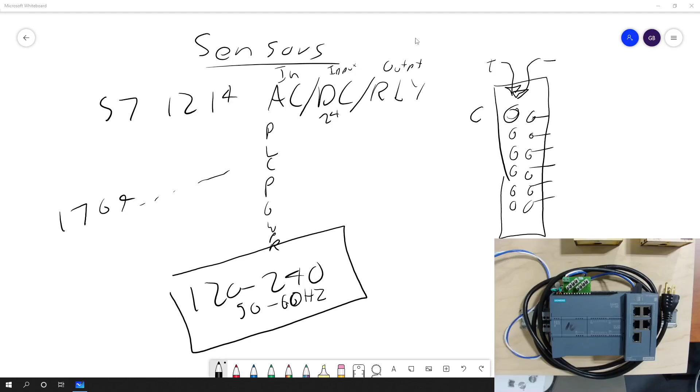I digress. So, PLCs are, overall, in my opinion, wonderful devices. Let me just move this up. Can't go any higher. That's interesting.

As I talked to you guys last class, in previous days, if you wanted to hook up, say, 3 limit switches to a relay or whatever, you would wire a limit switch to a limit switch to a limit switch, to your relay or whatever output it was. And you would physically take a jumper wire to all those things. Fine and good, no real issues there.

And when you're first wiring your machine up, it's not a big deal because you're running all the wires anyway, so where you run the wires to doesn't make any difference. The problem is down the line when you want to say, you know, we really don't need this limit switch anymore. Now you have to go take that limit switch, unscrew it, connect the two wires together there, which makes a joint there that you might not want.

And it's okay, and then you're like, oh crap, we need to add another one over here. So now you got to break a wire to come up and put another limit switch in, and then come back down. Life just gets very, very annoying as you're constantly tweaking this wiring diagram.

More importantly, hopefully you're not just tweaking it on the machine. Hopefully you're tweaking the actual diagram that shows you how everything's wired, and hopefully you're updating the numbers. So hopefully this is wire 1, this is wire 2, this is still wire 2, and then 3 and 3, and 4 now comes up to here, 4, 5 to 5. Hopefully you're updating the numbering as well.

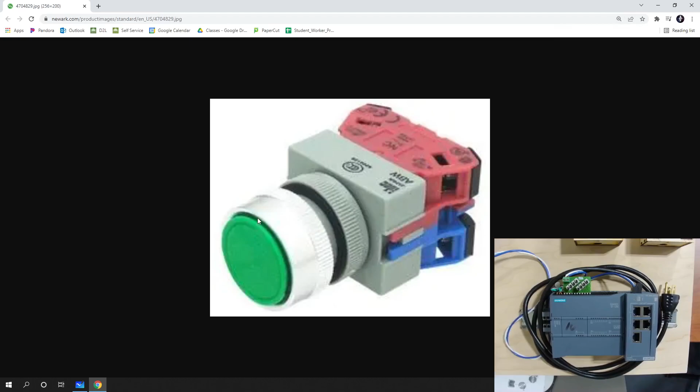There we go. So here's your standard push button start. As you can see here, this button now, you've got a little bit of a dividing line. You've got a red side and a blue side. The red side, I'm going to guess, is your normally closed, and the blue side would be your normally open contacts. So depending on how you need the push button to be wired, you would wire it differently.

And if you had 10 things that all needed normally open contacts, but they couldn't be in the same circuit, you would take these blue and red sections and you would just stack them. So you would have another thing here like that, and then another one there like that, another one there like that, and you would just keep going with it.

And every time you would add another one of those, it would actually make the button harder to press because all of those have springs in them. So technically, there's no limit to how many of these things you could stack other than the depth of your box. In reality, there's a limit to how many of these buttons you want to press.

No, but you could do it. You could literally have 20 sets of contacts on these things, and they'd all get pressed every time you press that button. But again, this makes wiring a royal pain in the rear end.

All right, so what we've started doing is we come down and we now have our PLC. Talked about this, guys, a little bit last class. So you have your inputs, it's going to draw 4 of them, 4 outputs.

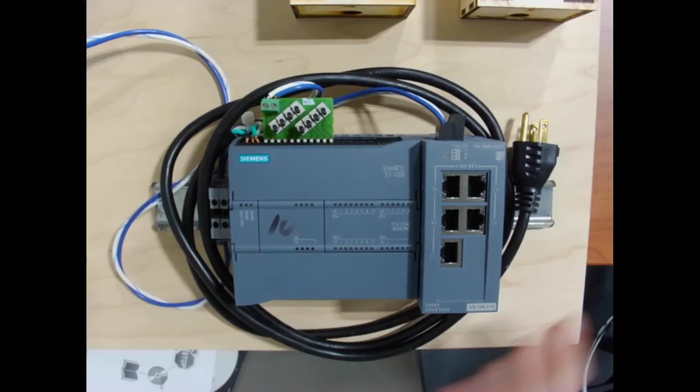So we have our inputs on the left, and we always start at 0, and you have your outputs on the right. This isn't necessarily right and left. If we take a look at this one, at the top, that's where our inputs are, and at the bottom, that's where our outputs are.

Again, if this was, if we had more modules on the side here, where the Ethernet switch is, that would be your inputs. The next one would be your outputs. And the next one could be inputs again. The next one could be outputs, or it could be analog, or high-speed counters, or whatever combination of I/O that you need. You would just keep slapping more and more modules on. I think this PLC can handle up to 8 modules for inputs and outputs.

Or you could have communication modules there. So it's just a never-ending game.

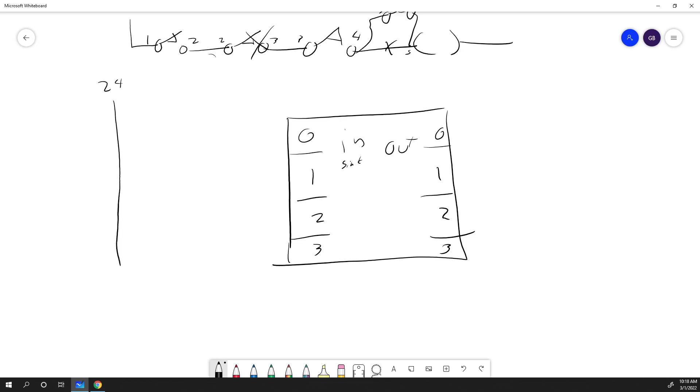But anyway, nowadays what you would do is take this and say this is a sinking input, so we're looking for 24 volts coming in. We'd have our 24 volt line here, and you'd run off of this, and traditionally it'd be one input per input. So we have one limit switch there, another one here, a third one there, and maybe a little push button down here. You just have one input, one actual sensor, button, limit switch, photo, whatever, per input on the PLC.

Could we, in theory, put a second limit switch here? Any takers? Yes, in theory you could. That would be permanently wired in series. So you have to think about that in your code, that both limit switches would have to be true for whatever it is to be true in this code.

But yeah, you could wire multiple in series. The downside of doing that is it makes troubleshooting harder, because if you don't know there's two inputs, two limit switches on this, and you're out there pushing a limit switch going, which one is this? And you're like, it's not lighting anything up, the wiring must be screwed up. Now you're having a problem troubleshooting because you're thinking one sensor goes to one input, which is overall the standard. But yeah, you could do two in series, you could do two in parallel if you wanted to, you could do something like that. That would be fine, that's an or statement, so one or the other. But again, ideally, one input per input on your PLC.

Now you have your output over here. In our case, we only have the one output.

But anyway, so here we can see some - that's my download manager. Here we can see some PLC code, and you can see I've got a make contact, which is again normally open, and I've got a break contact here, which is normally closed. And the real world switch here is normally closed, which lets power flow, and then as soon as this device rotates around and hits that limit switch, that keeps it from rotating more and basically running a stop into a wall. So that's why we threw this up there.

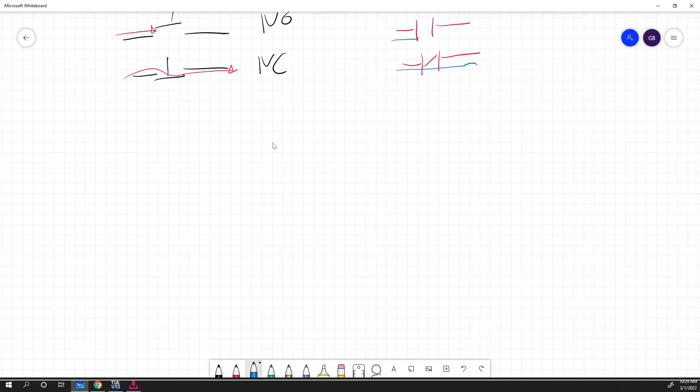Now, the other wonderful thing you have in the world of PLCs is addressing, right? And it's how do we reference the inputs? If I pull back up my PLC over here - let me get the wrong button - I'll pull up my doc cam. All right, let's give it a little focus, and let's just zoom in some.

There you go. So you can see I have DIA 0 through 7, and I have DIB 0 through 5. And I appreciate them labeling them A and B. However, in the software, nowhere is there A and B. It's like, why did we go with A and B? In default, in the world of Siemens, it starts - A is 0.

So you have digital input 0.0 through 0.7, and then we have digital input 1.0 through 1.5. You don't see it - thank you. Go to the right screen. There we go. All right, so you've got digital input 0 through 7, and input 1.0 through 1.5. Now, again, A would be 0, B would be 1.

However, in software, you can change it. You can be like, nah, input A is now input 5. And it does go 5 and 6, and it's always one right after the other in this case. I don't know why you'd ever want to change it. Siemens gives you the option. I think it's silly, but I'm like, okay, I understand.

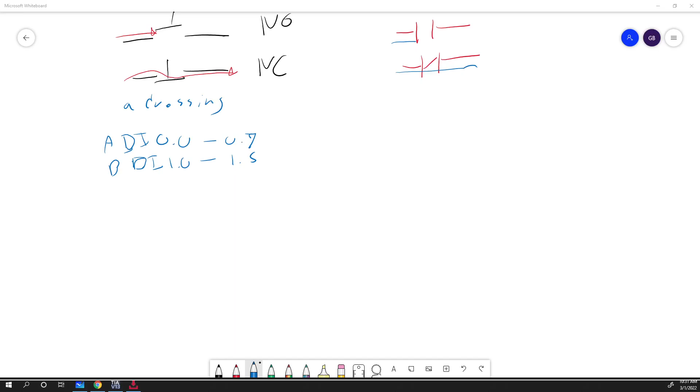It's there. You go to Allen Bradley and the RS Logix 5000 - do I have that installed on here? No, I do not have it installed. It's like local, because you can have local or remote, depending on where your inputs are. The local would be attached to the PLC, remote would be all on the network. And then it's like local dot, 0 dot input dot - this is wrong, but anyway - dot data dot number.

I'm like, holy crap, that is a lot to remember. I mean, that's RS Logix 5000. Go to 500 is a whole different game. It's just this never-ending game of things being different, which is the part that drives me absolutely batty in the long run.

So the labeling of these is really annoying. And again, you'll get used to this. You're going to be in whatever environment it is that you're in. That's mainly an Allen Bradley, mainly a Siemens. Those are the two biggest names in PLCs.

Siemens and Allen Bradley. I was just talking to an ABB rep, who does the robots that we have in here, and he said that Allen Bradley might actually be starting to lose some market share. Allen Bradley is mainly, I think, a US-based company, where Siemens is Europe.

So Europe uses a lot of Siemens, where Allen Bradley is more US-based. It doesn't mean there's not Siemens PLCs here in the US. Obviously, I have a whole 12 of them in the closet back there, so we use them here.

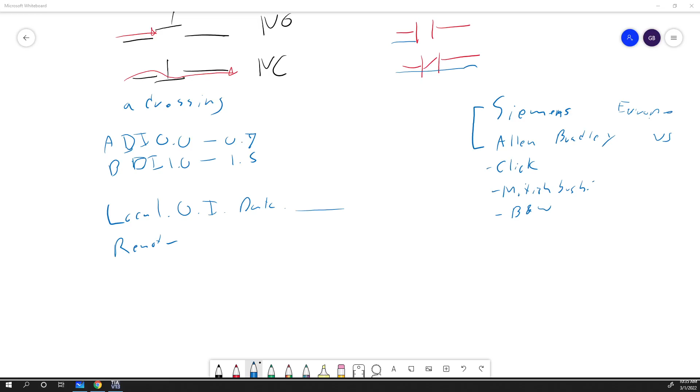Many people don't have that opportunity, it's just for buying stuff. And the other benefit to having it all in one is you can monitor it all a lot easier. You all have one company, you could have one HMI that talks to every freaking PLC in the building that's on the network. So you could have one master control station, and this makes your life a lot easier. That'd be my suggestion, but again, to each their own.

So anyway, in the world of Siemens software, let's just do this. Let's add a new device. So here you can see we've got Siemens, we've got 1200, 1500, 300, 400. I've got no clue what the ET200 is.

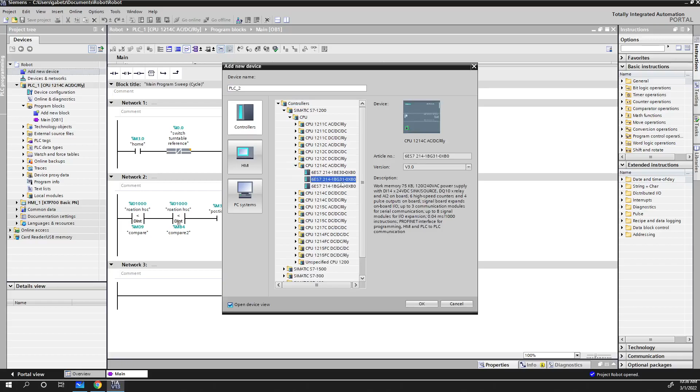But then inside the 1200, you've got 1211s, you've got 1212, 14, 17, more 14s, 15s. The list just goes on and on. And some of them are just different enough - oftentimes I have students and I'm like, you need the 1214C AC/DC relay BG40, which is this one, and they'll select the BG31. Yeah, you've got 3 variations of the AC/DC relay. I'm like, you gotta be kidding me.

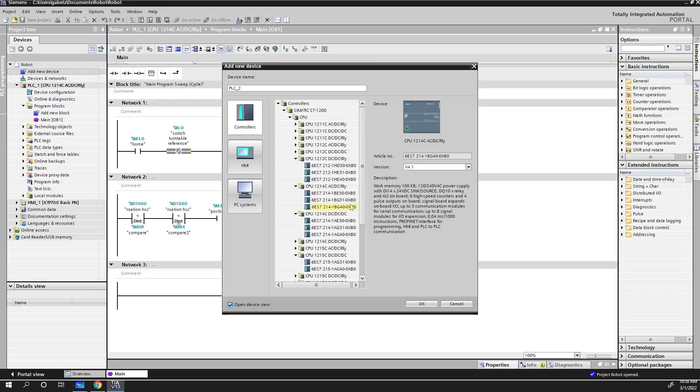Then most of the time you can manually copy your tags and your code over. It doesn't always work, but you can, at least that's a good place to start first. So yeah, highly suggest doing that one. It's just this never-ending game with PLCs.

But anyway, you can see some code here. No, of course, that's not going to work now. There we go, can I draw? There we go, you can see some code.

Again, this is very simple code in the long run. I've seen programs with over 1,000 lines of code, and that's 1,000 lines strung up over like, I don't know, 10 or 15 different subroutines. And I'm guessing at the 1,000, I haven't gone through every subroutine and counted every line of code. I don't need to, I'm like 1,000 lines of code.

Okay, all the PLCs have a specific amount of memory that you can load your program into. And while I've never hit a limit, I've heard stories of times where they've hit limits. It's like, yeah, we need to change PLCs or optimize our code to reduce the amount of memory being used because we don't have enough space to save the code to the PLC. I'm like, how big is that freaking code? How long does it take to run that code?

Yeah, I mean, it's like I've never seen over 2 milliseconds for my loop times, and that's normally like one time it was 2 milliseconds, probably the initial run, and then after that it's been back to 1 millisecond. How many lines of code is it? Like 1,000 lines, is that a 10 millisecond loop time? Is that a 3 millisecond? What is it? How many lines of code do we run per second here?

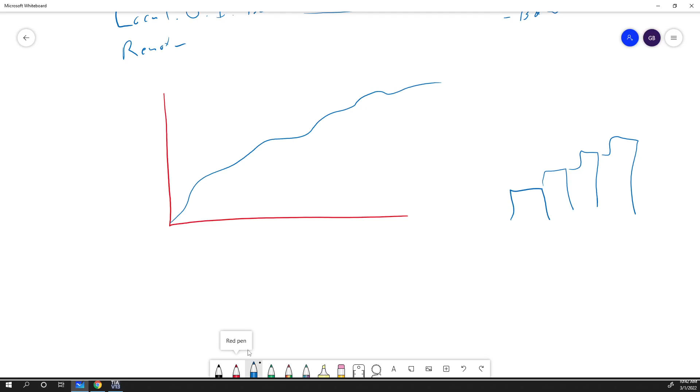So what we have is ADCs and DACs. ADC is your analog to digital converter. So what do you think a DAC is? Analog, yep, inverted - digital to analog converter. So an ADC would take this variable temperature sensor here and convert it into, say, an 8-bit number. 1, 2, 3, 4, 5, 6, 7, 8. This goes back to the whole wonderful world of binary, where these can all be zeros and ones, and when you add them up, you'd have 256 different possible combinations there.

So if your temperature sensor had a range of, say, 25 degrees, so 90 to 115, you would have roughly 1 degree steps. So you'd be able to say whether it's at 90, or 91, or 92, or 93, whatever the case is. That's how many steps you'd have.

Well, if you needed higher precision, say you need to go down to 0.5 degree, you have 2 options. Option 1 is buy a different temperature sensor. So instead of a 25 degree range, it only has like a 12 degree range, so maybe you only have from 90 to 102. Now you have 90, 90.5, 91, 91.5 - every 0.5 degree increment. So if the temperature sensor is reading 90.4, it's going to round it up to say 90.5. If it's reading 90.2, it's going to round it down to 90. So instead of having this beautiful curve here, you actually have a whole bunch of steps.

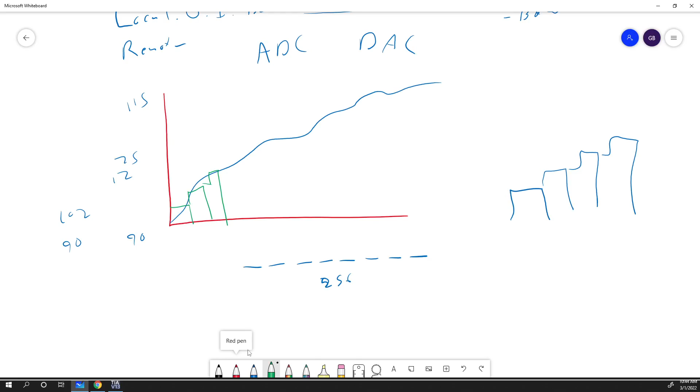Those steps should have a common width to them, so it's between those two. The sensor is going to tell you, hey, it's actually this value, but your digital computer can't deal with it. And this is why audiophiles, or people who really like analog, don't like a digital world - because you're losing information. You are actually losing information. It may be a small, microscopic amount, but you are losing that information.

Now, I told you one option was finding a temperature sensor with a smaller range. The other option is finding a better DAC or ADC. So instead of an 8-bit, you went to a 9-bit - that now gives you 512 different combinations. Or you go to a 10-bit, which gives you 1024. So you could do those types of options. With the same 25-degree range, this gives you 0.5, this one gives you 0.25 degree accuracy.

So that's how the PLC works - it's the only option it has. It has to take that, it converts it into binary, zeros and ones, which the PLC can then convert from binary back to decimal and say, oh, that is 256 or 892 or whatever the case is. But all it knows is it's just in this range. Now you have to take that number and convert it to the temperature.

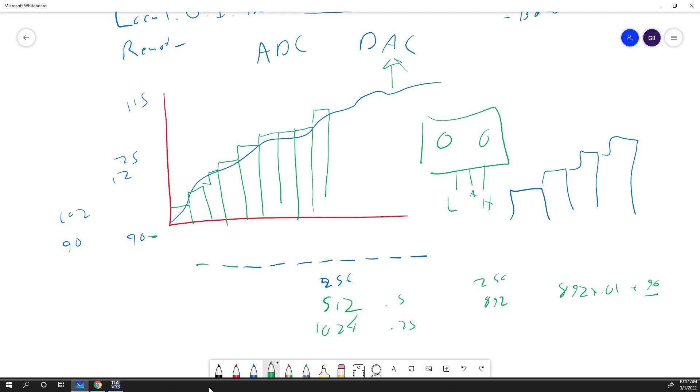It will pulse out at a certain speed, sending these pulses, and it's okay, it's a voltage of 15 volts. That's all we can tell. So it's a lot of give and take when it comes to the world of analog. The other thing we do with an analog world when it comes to PLCs is comparators,

which I have—not going to work again. Let me get my pen back up. We have comparators right here, which, as you can see, these are both doing less thans, but they could be less than, greater than, equal, or not equal.

This is my favorite. How would you guys say 'not equal' with symbols on the keyboard? The less than sign, that's on the keyboard. The greater than sign, that's on your keyboard. Some places use exclamation mark and equals—that's saying not equals.

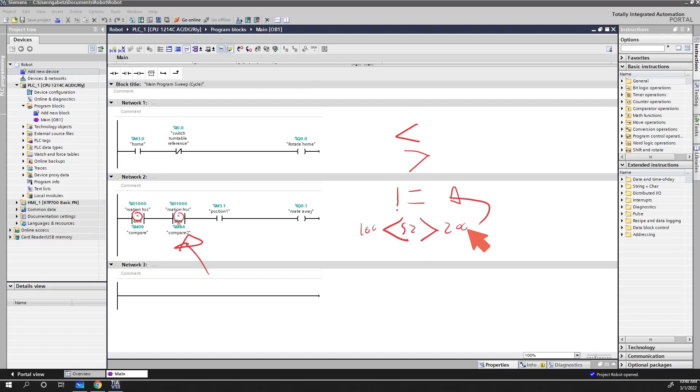Siemens uses less than or greater than, which actually does make sense. Like a number, 52—is it less than 100 and greater than 200? It can't be both less than and greater than something, so it does actually make sense. It truly makes more sense to me than the exclamation mark, except I'm used to the exclamation mark from programming. So I would have preferred the exclamation mark, but they use less than and greater than back to back like that. So it's a little bit of give and take.

You also have math operations, which I don't have in this code, but let's pull some up. So you could do like an add block.

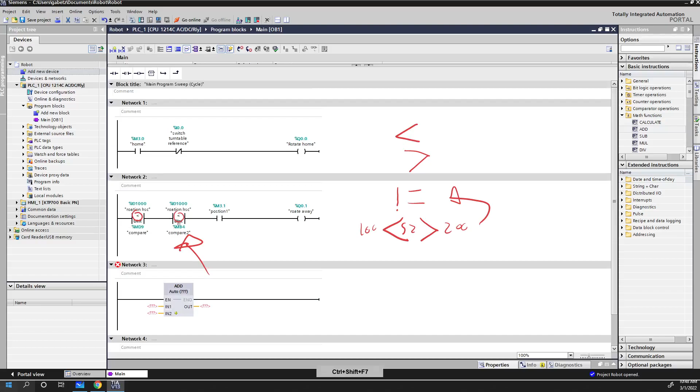Why are my shortcuts not working? Maybe it's bigger. And you can see the add block has an in and an out—in one, in two, and an out.

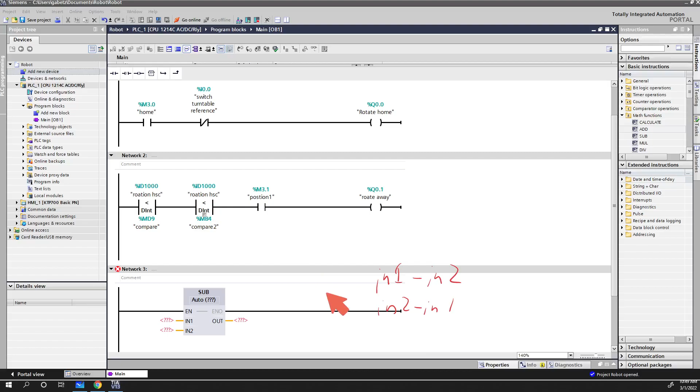And my fun thing here is when you go to a subtraction block, in one, in two, and out—if I were to write that out, would it be in one minus in two, or in two minus in one? I guess the order does matter, right? With subtraction there's a difference, so it's important to know which one it is. I believe it's the top one.

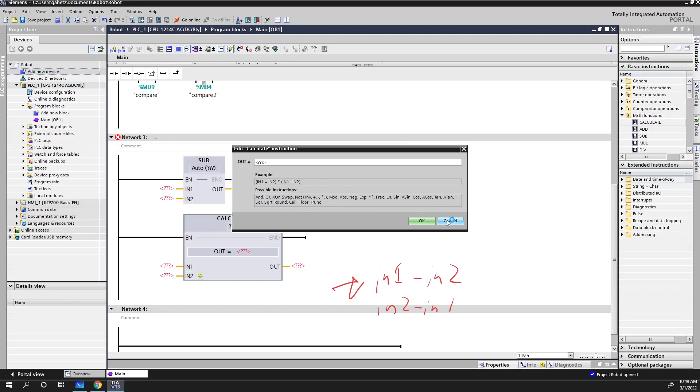To help solve that problem, I like the calculate block, because then you can just come in here and write out your whole function—it's plus, minus, with parentheses, and it's actually like a calculator, so it makes sense. Down here they show all the instructions: absolute, negative, exponent, fraction, linear, sine, cosine, tangent, square root, round, ceiling, plus, minus, divide—all sorts of options there. So I like the calculate block when you can use it, but sometimes it's very confusing to use, I'll tell you that right off the bat.

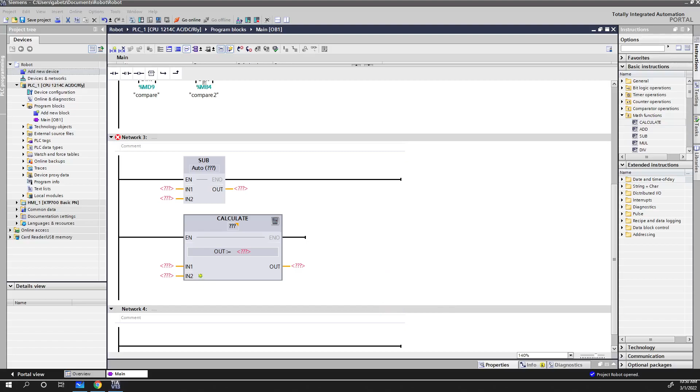It sometimes makes no sense when you're using it, so the world of analog is, in the long run, very, very hard in my opinion—just something to be aware of. But anyway, so PLCs—any major questions on those so far?

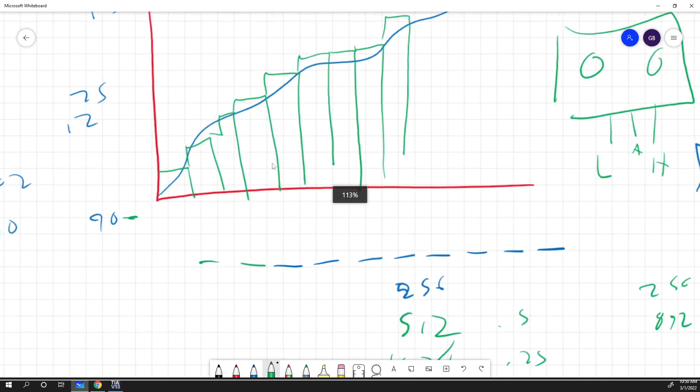All right, and it's lovely, I'm telling you, because I've had students wire up those boards before. I have boards back there with buttons on them and things—maybe I'll make you guys do it for fun, my fun, not your fun. But I've had students wire them up, which is something I did in my undergrad, which is why I created the boards here. It's banana wire, so you just jumper things back around.

It's really nice, really convenient. But when I did it in my undergrad, all we had was red wires. You'd write the program, and it didn't work how you thought it was going to. You're like, how do I modify this? And you're following wires from one switch to another to another, and they're all wired together. It just completely sucks.

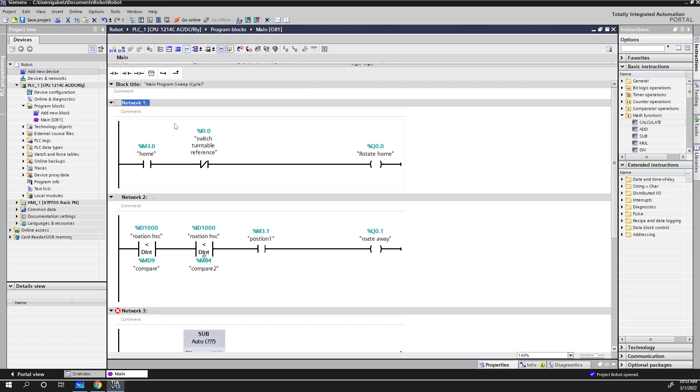Just like it's a big difference when your stuff's in a program and you can literally just scroll through it. You can just be like, yep, that line or that line. If I had 20 of these lines, they're all going to be wired alike, and they're all going to the same color wire. And oftentimes...

You're going to have this in a wiring cabinet. Let me see if I can quick find that picture again. I found it yesterday. This one isn't bad, actually. Let me figure out what my search was that made it pop up.

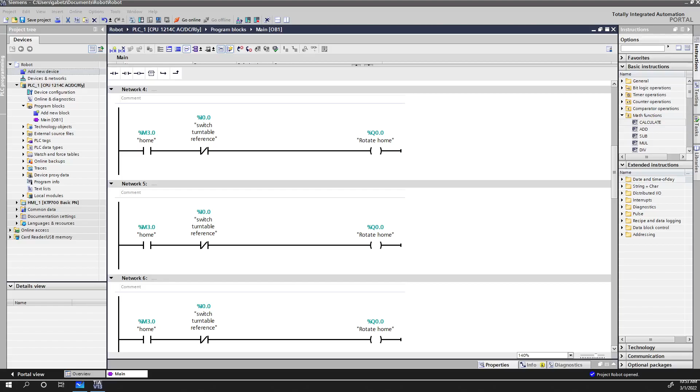And I think most of them are 32 wires, 32 I/O. 13 times 30, that's what, like 300, 400, somewhere around there, I/O on this PLC.

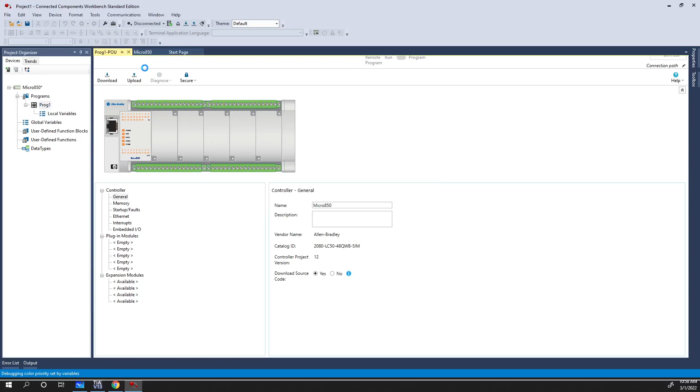So let's see, I call it what I remember. A direct contact and examine if closed, or a reverse contact and examine if open. Back to my whole make-break logic here. So again, you can kind of see how the software is different. Let's drag it down. Now it makes you select your input. Don't have any, so that's fine.

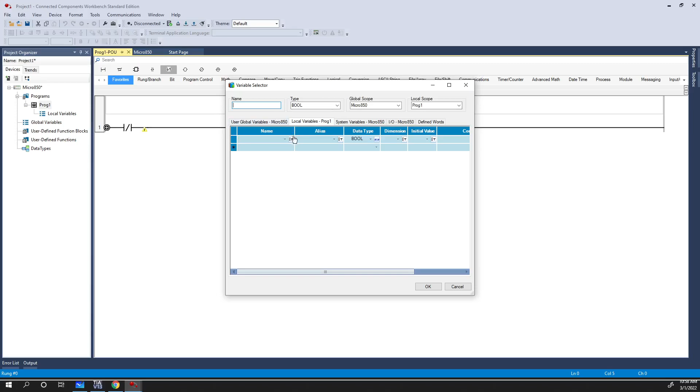So yeah, it's the Wild West when it comes to PLCs, all the different versions of all the different software. That's why I started making breaks. Other teachers were doing it, and I'm like, that makes perfect sense, I'm going to jump on the bandwagon and go make and break. That way, no matter what the software calls it, it's still a make or break. So I don't care if I'm using Allen Bradley or Siemens, if I tell you a make contact, you know that it's a normally open contact.

So, all right, that is my brief introduction to PLCs. We're not going to really dive down a rabbit hole. There is a whole other class in PLCs, INT 102. If you haven't taken that yet, I highly suggest taking it next semester if you need to. It is a fall-only course.

For those who are in the ADM program, there's also an ELE 203 PLC course, which is a springtime course, so I'd suggest taking it right after INT 102. Yeah, it's INT and ELE, I don't know why they're different. I just had to convince Ed and Juan to submit the paperwork to move them to be ADM or INT. Just pick one category, I don't care which, just pick one, make my life easier, call it PLC for all I care.

But yeah, it'd be really nice if we could just make them all one category and be done with it. Same with robotics, that's ELE 140. That also should probably be ADM.